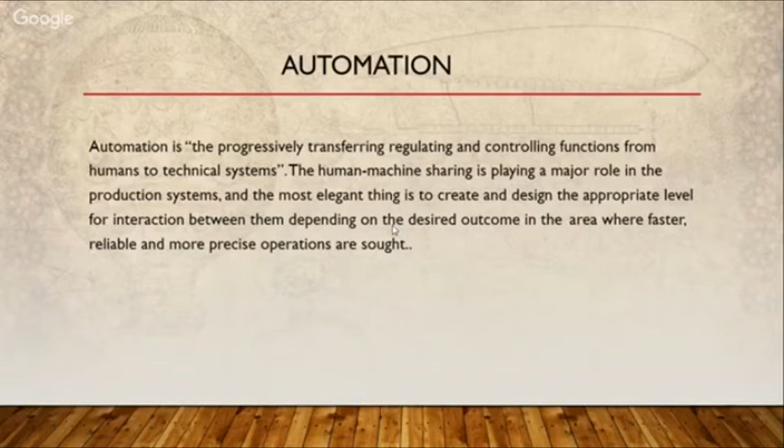Automation is progressively transferring regulating and controlling functions from humans to a technical system. This results in higher efficiencies, safer methods, and a faster way of working. There are some debatable questions on this. Some of you might question, how is it safer? If an automated system develops a fault, there is no other angle to correct it. Definitely. So we'll touch upon all this while we talk about automation and the human aspect further.

One of the prime examples of automation is in the industry. Industry is the prime mover of everything which moves and develops in the world. The automatic control of the manufacture of a product through a number of successive stages is automation. The application of this automatic control to any branch of industry or science also is automation.

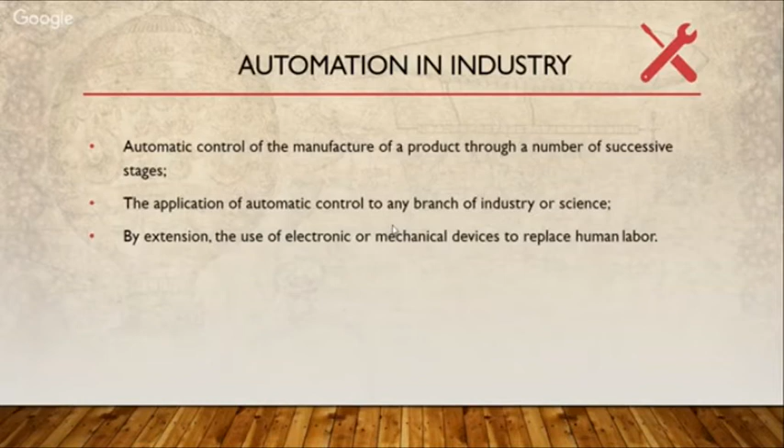So we'll first go into a brief history of robotics and automation, which you will see on the slide, that it started in a period as ancient as Greece and Egypt. This was by way of water, which was used as a power source in certain ancient ceremonies, and this was the first basic concept of automation in human life. In the 14th to 19th century, clockworks and other things driven for entertainment were a part of robotics and automation, or you can say the precursor.

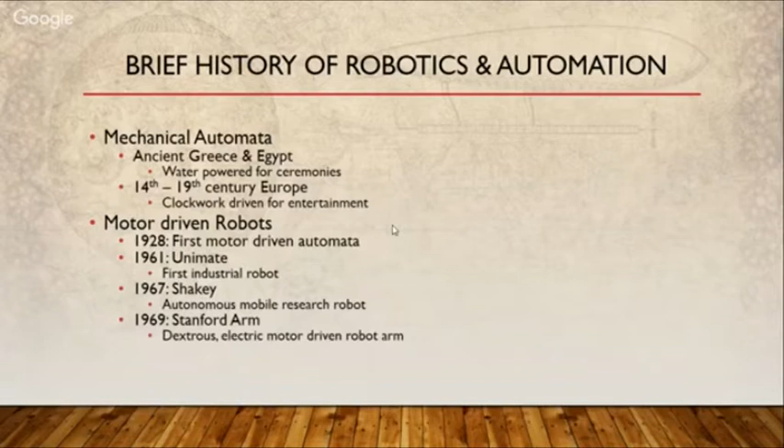Motor-driven robots were first brought into operation in 1928. The first industrial robot came in 1961. The electric-driven motor arm came in 1969. Now, automation has moved at a much faster pace in the 21st century.

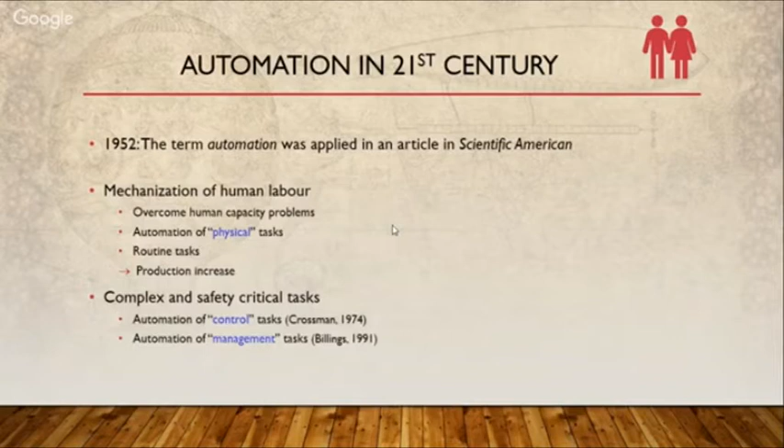We have used automation mainly to overcome human capacity problems: automation of physical tasks like loading, unloading, packing, routine tasks like production increase, welding, nailing, riveting, even segregation. So we are moving at a fast pace in mechanization in the industrial sector in the 21st century. Complex and safety critical tasks, control tasks, management tasks are also now moving towards automation.

The prime example of automation in our lives is also your cell phone. There are so many things automated through your cell phone, which today are a part of our lives. Knowingly and unknowingly, we are using automation, even to the extent of school children using the technology for their benefit.

In our lives today, automation is used for optimizing logistics, detecting fraud in the financial sector, composing art, we have digital art, and conducting research. A lot of research and testing methods are now automated. Data analysis is much faster through automation. Translations, intelligent machine systems like robots, and they are transforming our lives for the better.

You will be surprised, and maybe some of you might not be surprised, but everything Amazon, Facebook, IBM, and Microsoft is using is a part of automation and automated intelligence in our daily lives. Tesla is one of the prime movers in self-driven cars, and that is what they're using for automated controls of automobiles.

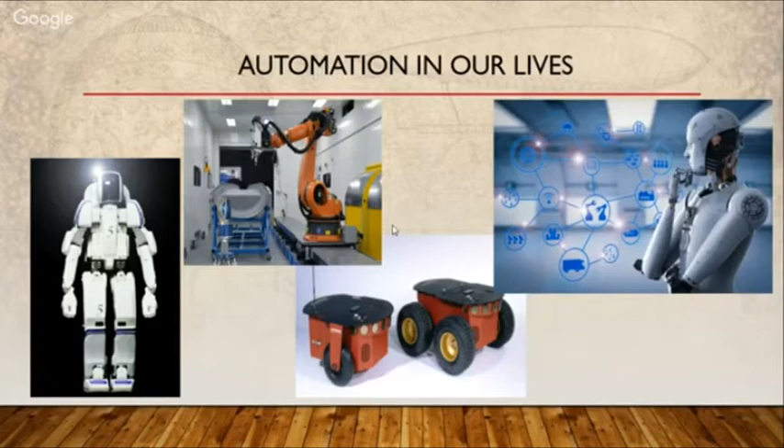The industrial robots sector is one of the most actively used and efficiently used automation systems in the world. Most of the automobile companies and automobile factories are right now automated to 90% of the extent. Certain tasks which are only left to manual labor are the ones which are being done by manual labor. Otherwise, automated robots and automated lines are a part of our lives today.

The automobiles are being made more efficiently, faster, and much more effectively. The welding which takes place in an automobile is much safer, much more uniform, and the quality is of exceptional standards, which a human being can never give. You'll be surprised to know that the rate of production of a car in Maruti today is 1.1 minute for one car. That is the time frame in which a car is being produced in Suzuki.

In the Italian automobile manufacturer, Fiat, the production rate is 55 seconds. Sometimes the capacity required at the rate at which marketing is able to sell the product also hampers the effectiveness and the speed of the automation. But the capability of the system is such that the factories in Germany and in Italy are and will be able to produce one car every 35 seconds if allowed to, and if the market demands. That is the rate at which we are talking of automation working in the industrial sector.

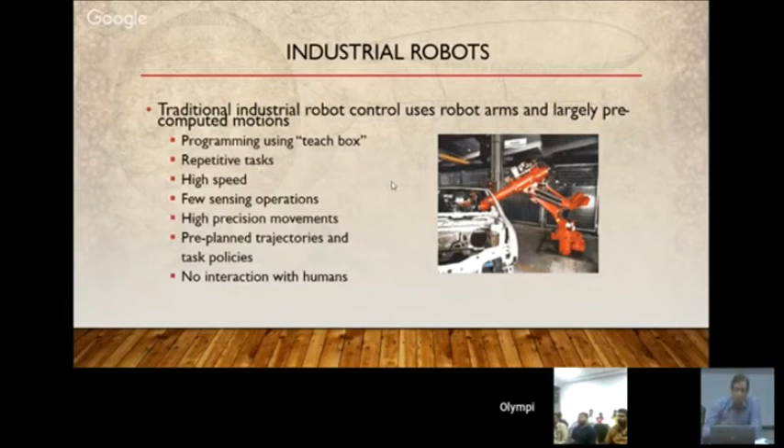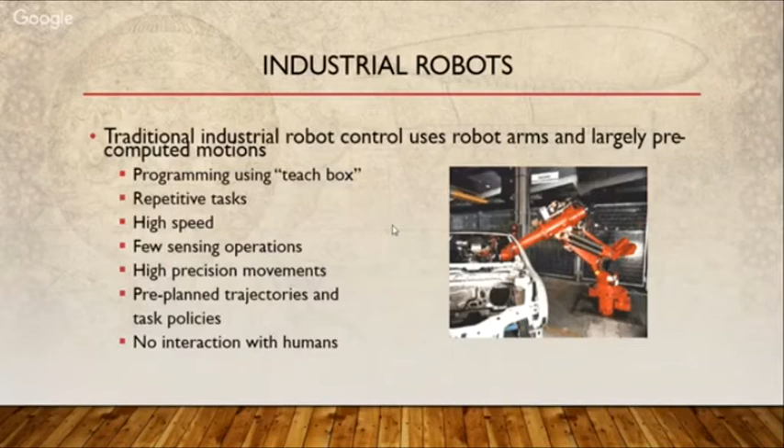Now, the industrial sector uses these robots for repetitive tasks. You can see it on the slide. For high-speed work, sensing operations, high precision movements, as I was explaining, welding, cutting to the right extent, pre-planned trajectories, and with no intervention of humans. If you are able to look on YouTube at a video showing the manufacturing of the Mercedes C-Class car, or even the Volvo, you'll be able to see the extent of automation of these industrial robots which has taken place in the industrial sector, especially in automobiles.

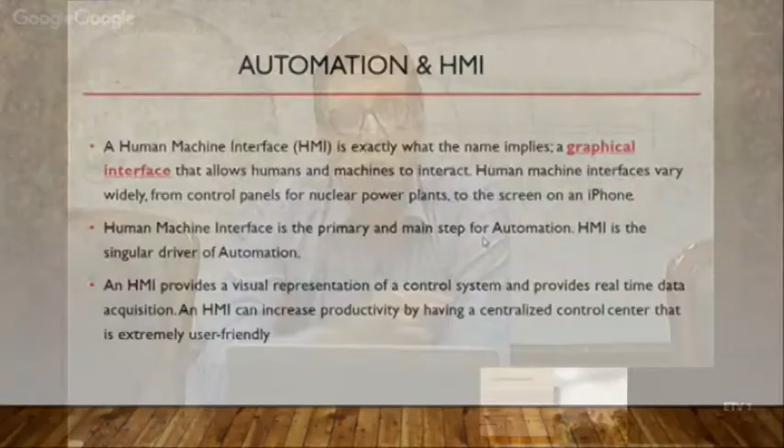The human machine interface also provides the visual representation of the control system. This can be in various forms: verbal, audible alarms, graphic interfaces, showing you how the product is behaving, how the machine is behaving, and also what corrective action is being forwarded by the machine. That is displayed to the human operator or controller of the machine. So the human machine interface is a very critical part of the whole system of automation.

Before we go into details of automation, we also need to look into the certain risks connected to automation. Not all automations are fail-proof or safe. However, the world is moving very fast into correcting these systems and taking care of these anomalies so that the automation we work with is safer and better.

Some of the risks we want to talk about are sometimes in the degree of proceduralization, so the automation system becomes too extensively overloaded to work on its own. Automation might fail due to various reasons. The technology might be so complex, or so low, that automation might not be possible.

Cost effectiveness is another factor. Sometimes manual labor, like in third world developing countries, is much cheaper than automation. You might not want to automate the line to that extent because buying or spending money on robots, or on automation, is much more expensive than actually putting people on the job.

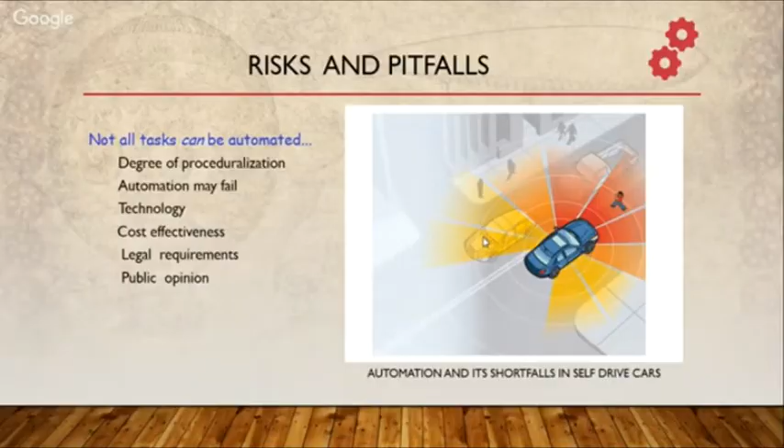You can see an example today in Europe. On the tolls, the system is totally automated. Your car has a tag that moves through the lines effortlessly. All cars are equal distance apart, sensors are alarming, and everything goes on like clockwork.

But in India, we do not go for full automation in such places. Why? Because we have cheap labor. On every toll, on every channel, you will find four people. On the barrier, two people, one person giving you a slip, collecting the money. We are still working in that system because we find that labor is much cheaper than automating the control.

Now the next point is legal requirements. Sometimes you cannot have an automated system because of legal requirements. You might have to put everything under CCTV surveillance, but there are areas where, due to legal requirements, you are not able to put CCTV cameras, so you cannot have control of visualization. Legal requirements also say that people's rights have to be respected, so you cannot put automation in places where legal rights, privacy, and other things of people are violated.

Public opinion might be very strong against technology in certain places; they will resist technology being put in. In certain cases, especially in India and other developing countries where vote banks are a huge issue, we are not able to put automated technology because getting the votes of the people is more important than making lives better and faster. That's another thing which moves there.

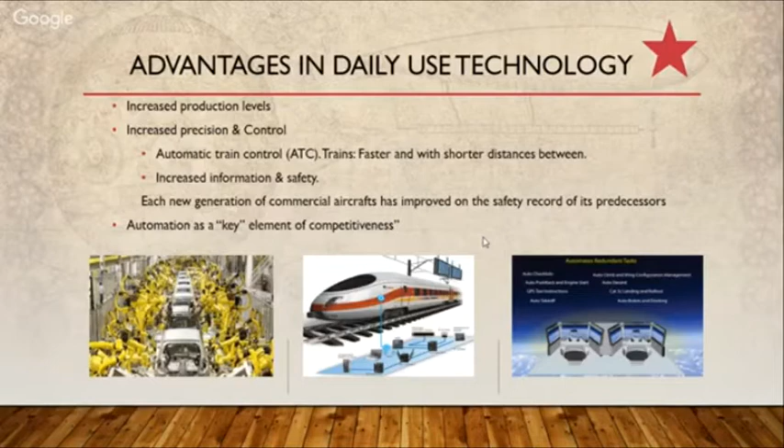We do have accidents in aircraft, and the black box gives us information, but it's a proven fact that overall safety and precision have gone up, and losses have gone down immensely, thereby saving human lives, making air travel much safer, and getting people faster from one end to the other.

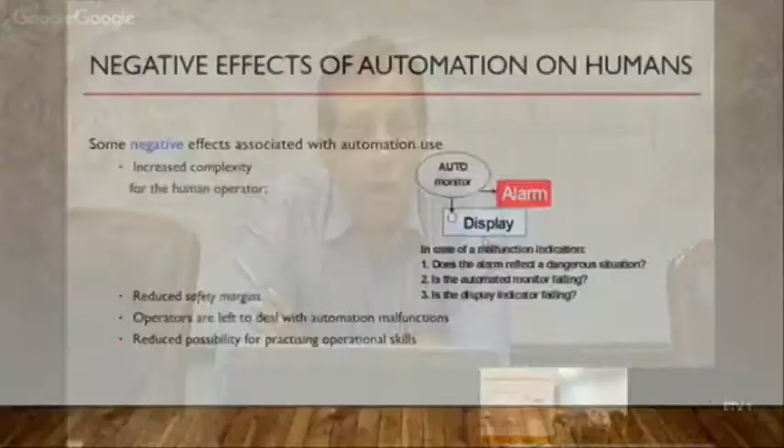Earlier, the operator only had to deal with his own malfunction, and only had to deal with how he was performing. He could re-correct himself if he found he had moved the tool a little faster. Now the operator has to move at the speed of the machine. The machine moves at an extremely high rate with the automated system, and if a malfunction takes place and the operator is not able to take corrective action, it will have serious repercussions.

One example I'd like to share is from one of the organizations where I worked, where we had an automated packing line for confectionery, bubble gums to be exact. The rate of packing of the machine was something to the extent of 2,000 pieces per minute. You can really experience, if you visualize, the speed at which the machine was moving to give 2,000 pieces per minute. There were 20 machines of this capacity working together on the line.

The automated line had to fill jars automatically, where the jar sensing automation system had to cut off the supply of bubble gums into that jar once the 150 mark was reached. You can imagine, if one machine was producing 2,000 pieces per minute, filling 150 pieces in a jar would take just 6 or 7 seconds.

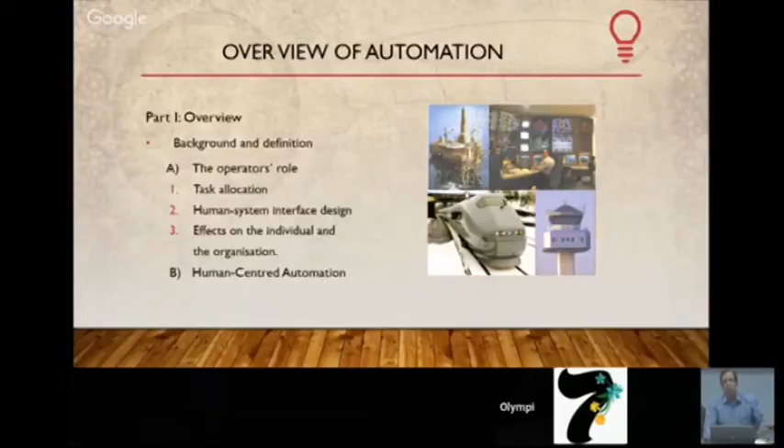Human-centered automation is another one which is a part of the design of automation system which we have to see. The key issues of automation—if we keep on with this, the most important issue is human. And the human being remains the most flexible and powerful weapon.

The human being is the most powerful weapon in the sense that we are able to justify, we are able to reason, we have the cognitive ability to think about a situation, which a machine does not have. In spite of whatever programming you might have in a machine, the human mind is still more powerful than that. Artificial intelligence definitely is moving, but we are nowhere near how a human brain can respond to a situation and be more logical than a machine.

One of the important aspects which I would like to just briefly touch upon again with you is that a professor of anthropology and history in Oxford, whose name is Professor Harari, has written a fantastic book by the name of Sapiens. In Sapiens, he gives us a very good example of how the human mind has evolved over time and how we have achieved supremacy over other animals and other beings on this earth.

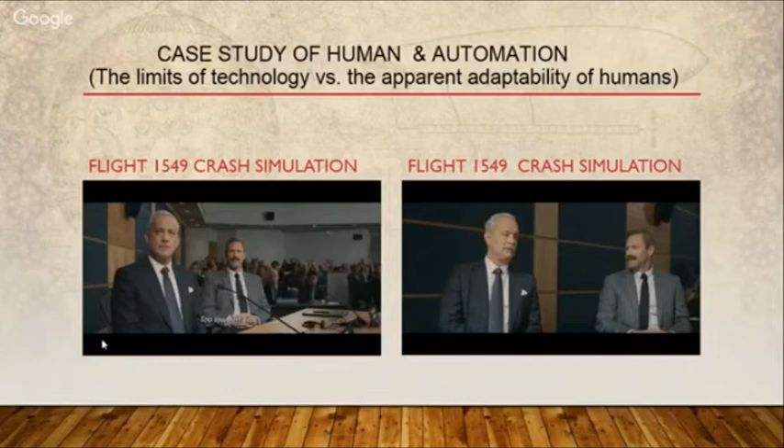The first video will show you how the investigation took place, and the two pilots shown here. This is a true incident in the history of civil aviation, where Captain Sullenberger, the commander, decided to land the plane in the river, whereas the automated system was telling him he could land on the airfield. That is what the inquiry took place over. Just have a look at the second video, which will explain how human logic and reasoning were much better than the automation system.

Too low, terrain. Fifty, forty, thirty, twenty. Successful landing at Teterboro, runway 19. They can have a whole... multiple airports, runways, two successful landings. We are simply mimicking what the computer already told us. A lot of toes were stepped on in order to set this up for today, and frankly I don't know what you gentlemen plan to gain by it. Can we get serious now? Captain, we've all heard about the computer simulations, and now we are watching actual sims, but I can't believe you still have not taken into account the human factor. Human piloted simulations showed that you could make it back to the airport. No, they don't. These pilots were not behaving like human beings experiencing this for the first time. Well, they may not be reacting like you did. Immediately after the bird strike, they are turning back for the airport, just as in the computer sims, correct? That is correct. They obviously knew the turn and exactly what heading to fly. They did not run a check. They did not switch on the APU. They had all the same parameters that you faced. No one warned us.

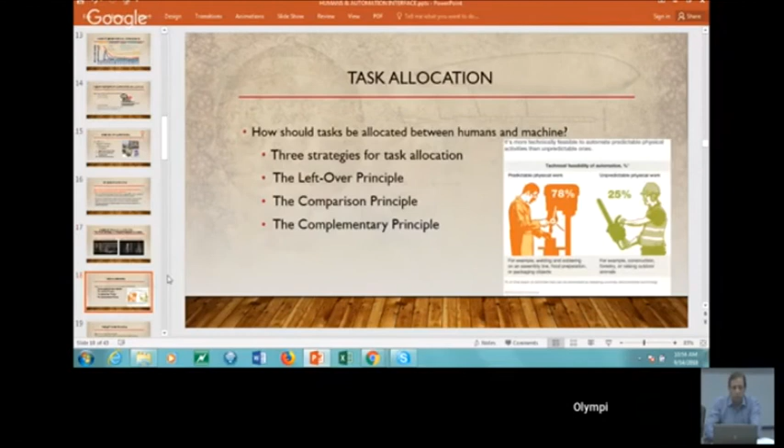Going to the next slide, we come to task allocation. Now, this is a very, very important point where we talk about how the tasks should be allocated. If you look at the graphic on the slide, it tells you that the major perception is that 78% of the jobs which can be repetitive or just monotonous can be delegated to machines or to automation.

There are unpredictable physical work jobs, cutting of trees, forestry, raising outdoor animals, and again, most importantly, jobs where human logic and reasoning is required are the ones which should be in the domain of the human operator with help from the automation system.

The three strategies of task allocation, therefore, keeping in mind what we have just seen in the videos and what we've discussed earlier, are: one is the leftover principle. Normally, tasks are allocated by these three principles: the leftover principle, the comparison principle, and the complementary principle.

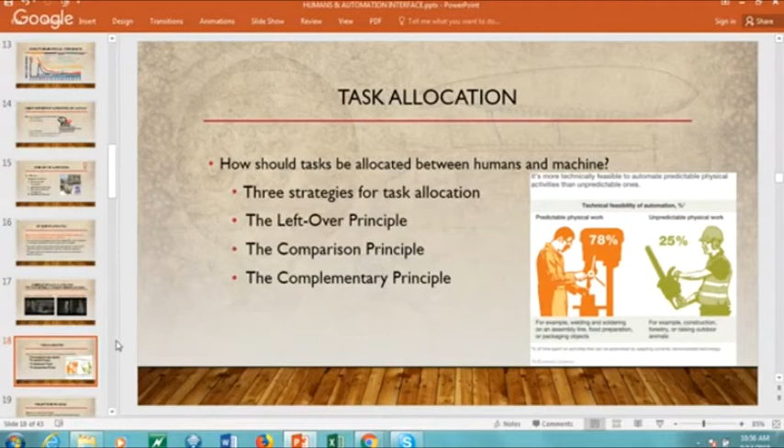We'll take these one by one. The leftover principle considers always, when designing a system, that the operator is most unreliable, that he will make a mistake, so let's put automation in this place. This is the basic premise of the leftover principle. The leftover principle also then thinks, okay, this is what cannot be done by the machine, let's get it done by the operator. So let's push it into his domain of work.

Everything cannot be automated, so let's have humans also. Let's try to make a compromise here and there, but not exactly keeping in mind his abilities. The pitfalls in this kind of system actually are that the operator needs to be much more vigilant. He is overloaded, and his cognitive requirements are not kept in mind while deciding on these issues. This is where the whole system of task allocation according to the leftover principle fails. So this is not the right system to allocate tasks. You will also all agree.

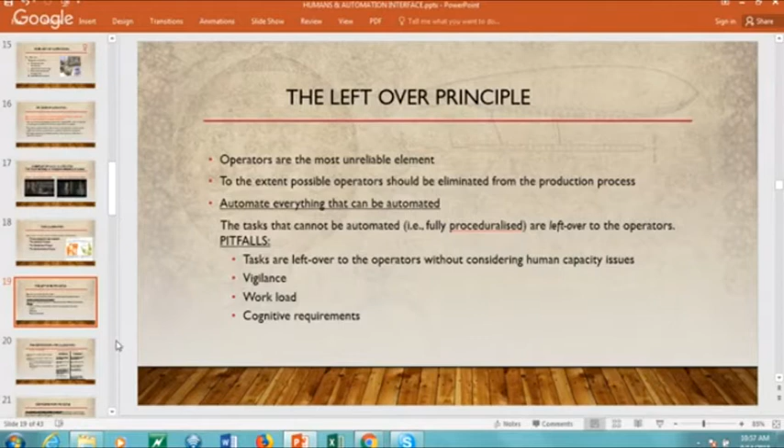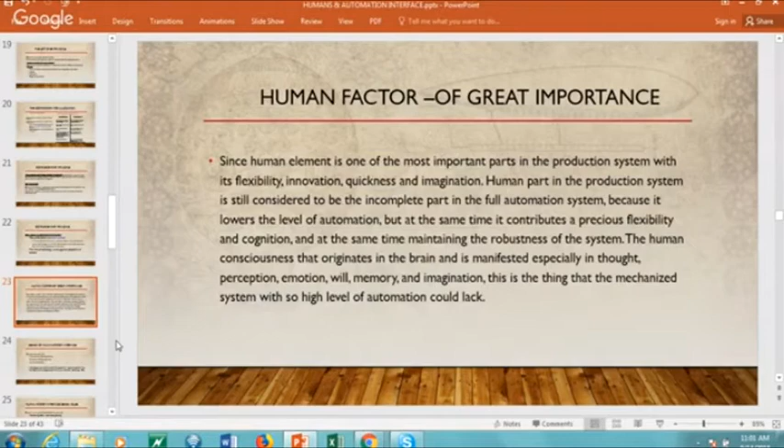Supervision is of great importance in an automated system. An automated system, like an in-flight system of a plane or of a self-driven car, or even the sensors in your normal car, called proximity sensors, which tell you that your car is near to another car or another object, still depends upon the corrective action that the operator will take. So the supervision needs to be constant. The alarm can come, but if it is not supervised, it can still result in an error or an accident.

Deviation handling. If the process has got deviations, it is the human operator only who can handle deviations. The automated system or the interface does not possess 100% capability of handling deviations. We will have ranges, we will have tolerances in every system. Again, the issue of reasoning and logic comes into play, which the human operator has to handle.

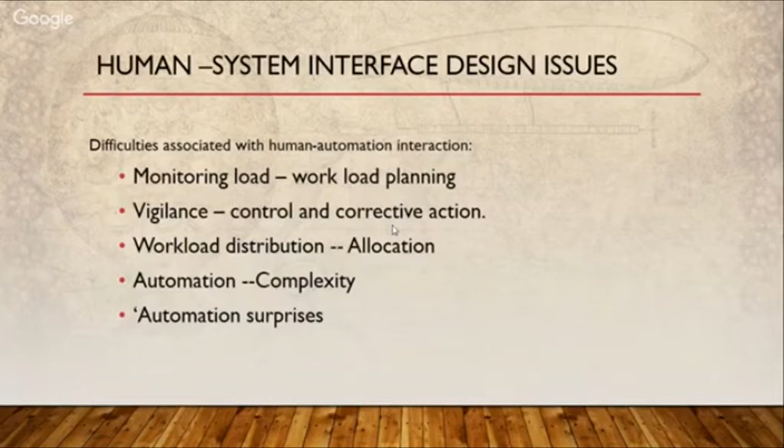The complexity of the automation. The complexity has to be such that if the automation system requires, the operator is able to handle it, and he is able to manage in the absence of the automation system. Automation surprises. Sometimes we see in operations that the human aspect, because it has not been taken into account while designing the interface, creates surprises where the operator lacks the ability or training to handle automation surprises. The complexity is a part of this surprise.

However, taking everything like this into context, we still have physical and mental isolation of the human being while designing an automation system. An automation system which is doing repetitive tasks, where the operator has to just load the piece on a machine, results in a mental and physical isolation of the human being. This results in a lot of other issues which we will discuss later. Workload distribution too high and too low, as we discussed. Because the interface has not been designed properly, the workload between the automation system and the human being differs.

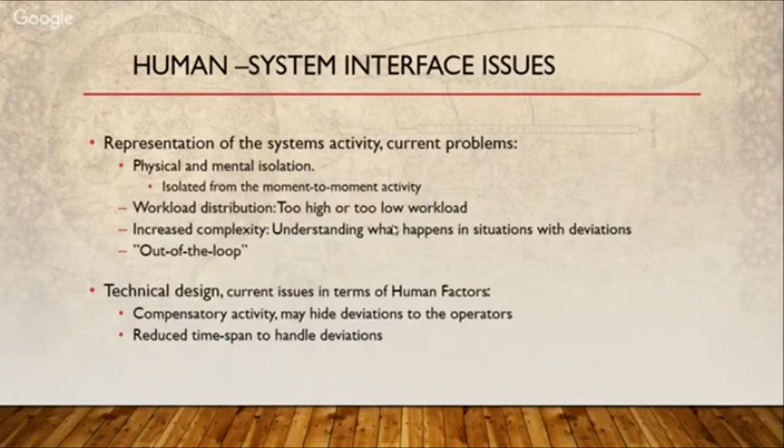Reduced time span because of the high speed and complexity of the operation. The time span to take corrective action by human beings is very less, microseconds. This aspect can be seen in any operation which is running at a very high speed, an example of which I gave you earlier also. And deviations need to be handled by human beings with the system interface helping him into taking timely action.

In the design of human and system interface, the degree of automated system should be done in a way that is transparent for the operator. So one of the most important factors that comes into play is that the human operator who's associated with the automated system needs to be aware step by step of what the system is doing, how the system is performing. The operator cannot be blind, or he cannot be cut off from how the system is performing.

Now, these problems can be handled by way of feedback from the system in various ways. The system itself keeps the operator or the human element updated on various changes, progress, and work as it is carrying out. These representations or the kind of feedback that the human operator gets can be in form of text, graphics, or sound.

So there are alarms which will tell you if there is a deviation or there is a movement which is contrary to the program. There is a graphic which tells you whether the activity is being done according to the way the system has been programmed. And text gives you a continuous display of how the program is moving, whether it is in line with the monitoring system, whether it is going out, or whether it is within control.

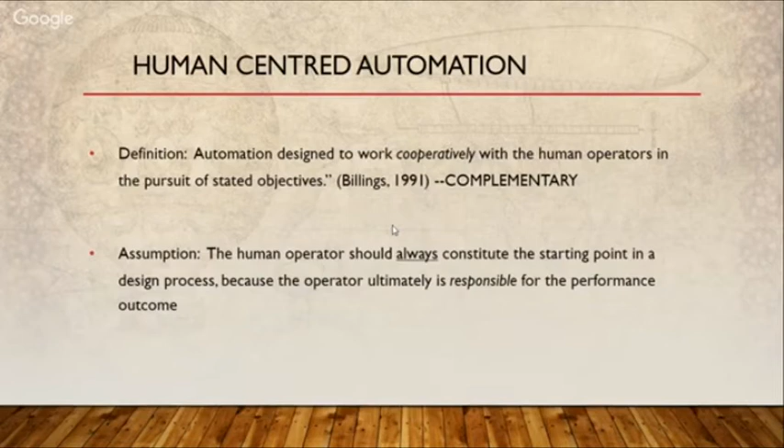Now, coming back to human-centered automation: as the name says, it is designed to work cooperatively with the human operator in pursuit of stated objectives. The three objectives we discussed - overcoming human limitations, increasing effectiveness and speed, and being helpful so there are no issues with the human being accepting the system - must be kept in view, and the automation system designed to work cooperatively with the human being. The assumption is that the human being must always be the main starting point for any design process; it cannot start from the machine. It has to take into account the human being, his abilities, his shortcomings, and where we need to help him overcome those in the process.

HCA, to take it further - the human-centered automation design system has to first keep the basic premise in mind: the human operator must be in command. We cannot take away command from the human operator, because doing so puts at risk issues we've discussed earlier - taking corrective action, not grasping the complexity of the system, not being able to respond faster to errors. All this comes into play. So once we establish that the human operator is to be at the center of this command, why is it to be done? One reason is so that he is able to command effectively - the human operator must be involved, then only will he be able to command effectively.

To command effectively and to be involved, the human operator must be informed. He has to be a part of the feedback system. Immediate feedback or immediate response has to come to the operator to feel involved and to command the operation.

The human operator must be able to monitor the automated systems. Monitoring, again, being informed is a part of monitoring. If there is regular information, he will be able to monitor the system much more effectively.

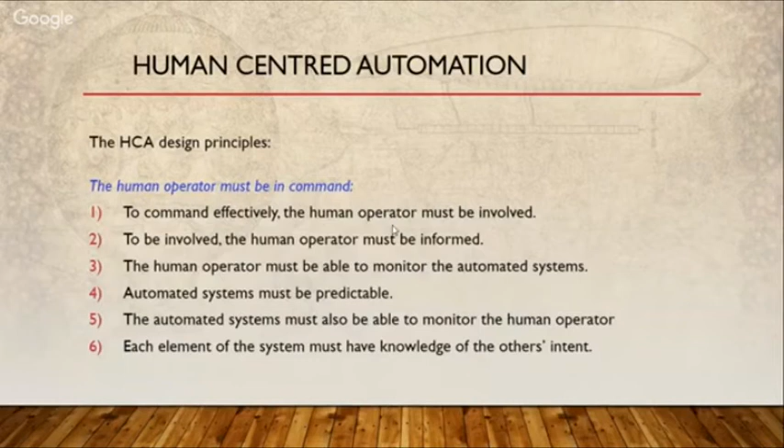Automation can assist by providing a range of management options. That means, logically, if automation assists by providing a range of management options, the pilot is able to take a logical decision. Otherwise, the logic is left only to his own perception and understanding.

If the pilot is involved, the automation system can assist by providing better and more timely information - aiding judgment on whether he can turn, whether he can land in these circumstances, what is the wind velocity, what is the temperature, what exactly are the air pockets. All this can assist in timely information and help in taking a better judgment.

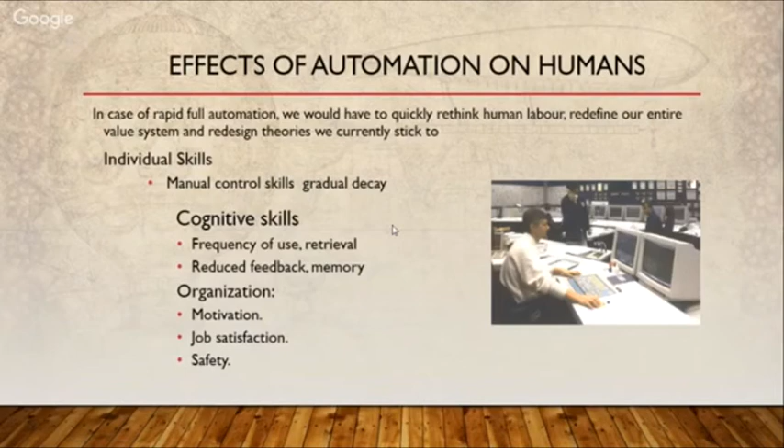The worker might have worked for a bonus or an incentive or satisfaction where the number of pieces he produced were part of what he was earning. Also, to show his skills, his effectiveness, his capabilities, there was a number with which he could be associated, that this worker has won a prize because he could produce X number of pieces in his shift.

If the automation system is designed without him, the effect on his morale, with people saying 'it's the automation system producing, it is not you,' undermines his capabilities and his motivation level goes down. He will always feel threatened that his incentive is going down because now he's no longer associated with productivity. Job satisfaction results in the same thing. The motivational factor, when it goes down, the morale goes down, job satisfaction starts going down, and the operator will never perform to his optimum level.

Safety is affected because the worker will become complacent. He will think that the automated system will take care of itself, and he will not be that vigilant. Again we come back to reduced feedback and reduced memory, which are effects of automation. This also results in complacency, and complacency results in accidents. You will find that although automation helps in giving alarms, if the operator is not vigilant enough, because of repeated working day in, day out on an automated system, his reflexes go slow, and that results in lack of safety.

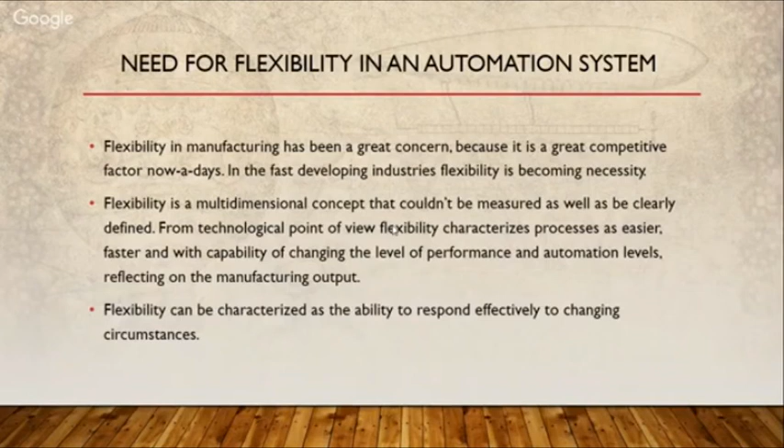So flexibility can be characterized as the ability to respond effectively to changing circumstances. This is where collaboration has to happen between humans and automation.

We will show you two videos which give you the present use of how automation and the human angle have come into allocation of tasks, where using automation, if only human labor was used, it would have resulted in much lesser productivity and a less efficient process. This shows how automation has helped, and also takes you through how automation is moving ahead for the future, keeping in mind these collaborative issues to really take technology to a newer level. So just have a look at these, and then we come back to the slides again.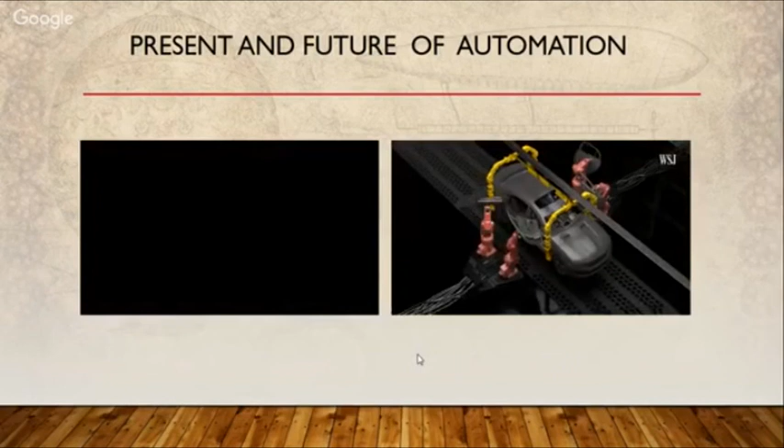Yes, right. To see how they're changing manufacturing and whether they're sealing the fate of low-skill workers. Every other year, Tokyo plays host to the world's largest robotics trade show, IREX. It's no coincidence the show is in Asia. Here, robots are being bought and sold in numbers unrivaled anywhere else in the world.

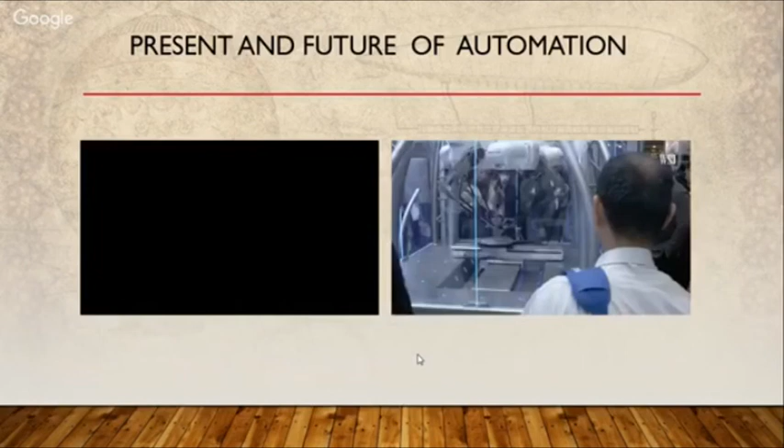These are the types of robots Professor Eric Brynjolfsson is keeping an eye on as MIT's chief scholar on the digital economy. We used to have to really painstakingly teach the machines step by step, program them what to do. And now machine learning is enabling the machines to figure out on their own how to solve problems. You put together the algorithms, the data, and the computer chips, and you get sometimes a million-fold improvement in the performance of these systems. Million-fold improvement.

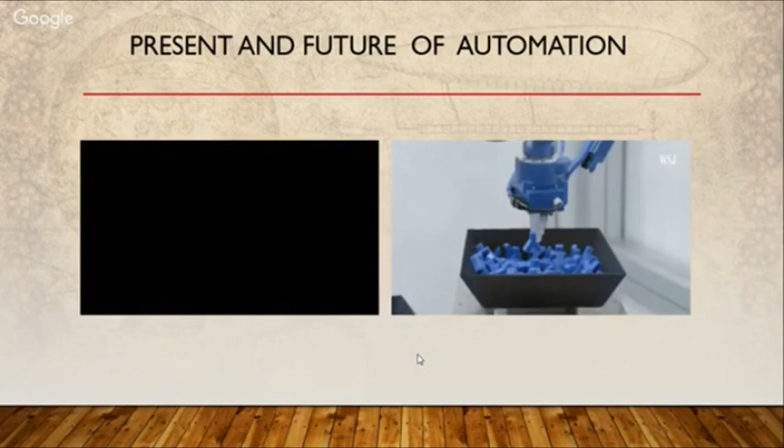Yeah. And what does that allow you to do? So one really important thing to do on the factory floor is just be able to recognize objects. And that's something that only humans could do well until recently. At IREX, we witnessed a robot handling a task that I, as a human, don't do so well, futzing with one of those pesky tape dispensers.

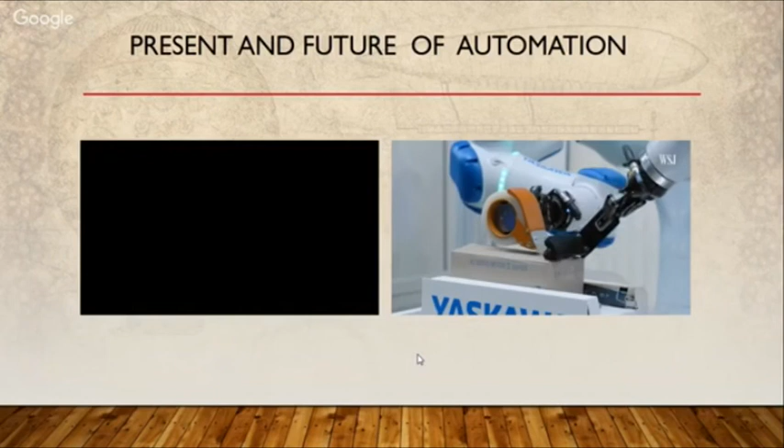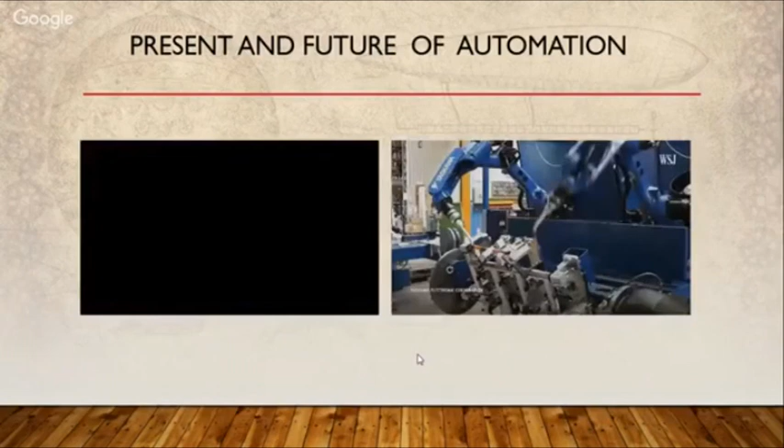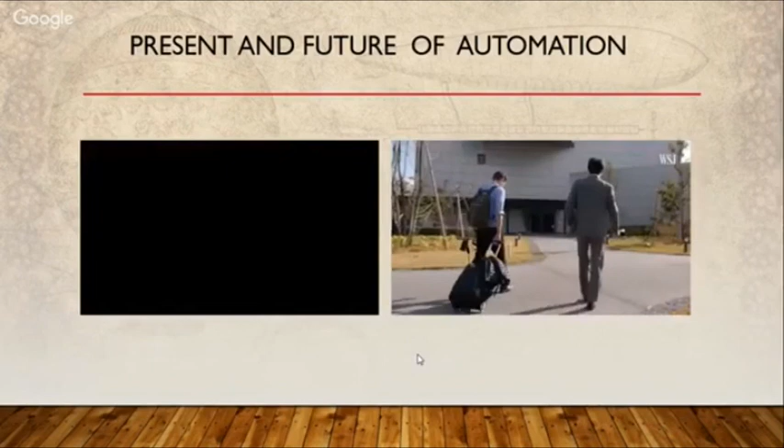It's among the latest offerings from Yaskawa, one of the world's largest manufacturers of industrial robots. Its main sellers are large industrial robots that do dangerous things like welding car parts. We visit one of Yaskawa's robot manufacturing facilities in the southern port city of Kitakyushu. Here, the public can try controlling and racing against AI-enhanced robot arms.

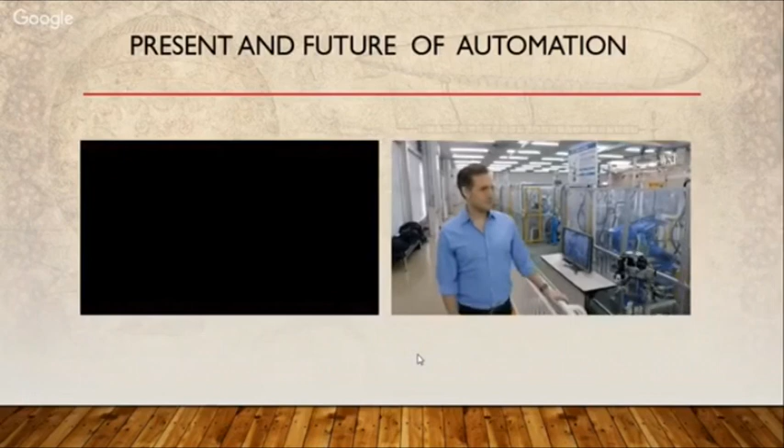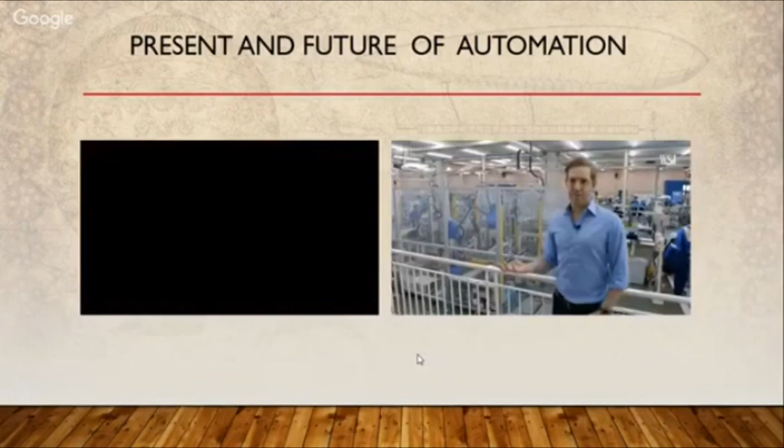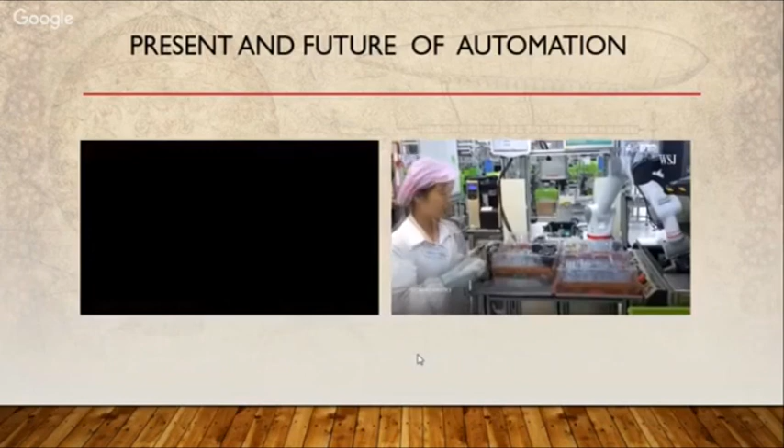You're done. We got to see where the robots are made. The robots themselves, they're sealed off by these plastic barriers. The workers aren't allowed to be in there while they're in operation because they're making these very fast movements. The head of the robotics division at Yaskawa, Masahiro Ogawa, seems most excited to talk about robots that don't need to be walled off from humans, that work alongside employees. In the industry, they're called cobots.

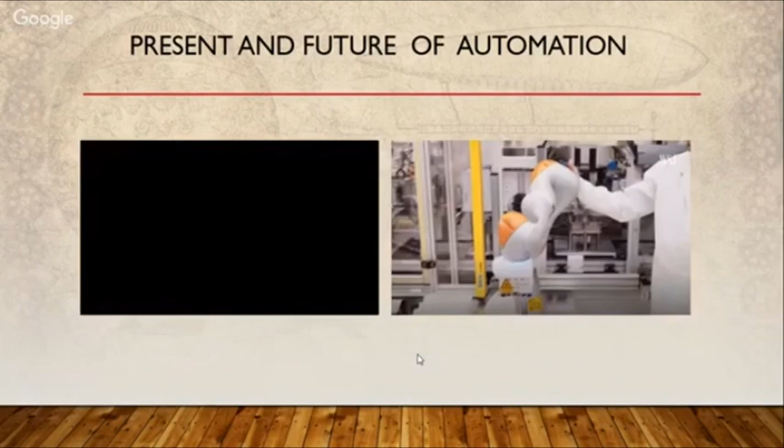The International Federation of Robotics predicts in coming years, cobots will lead the robotics industry. That's partially driving startups like China-based Elephant Robotics to get in the game. Hit people, so you just stop. Yeah. So work with people. Yeah, works with people.

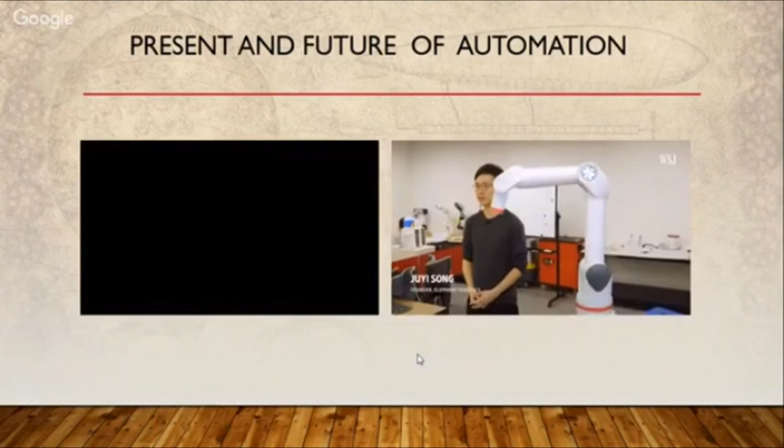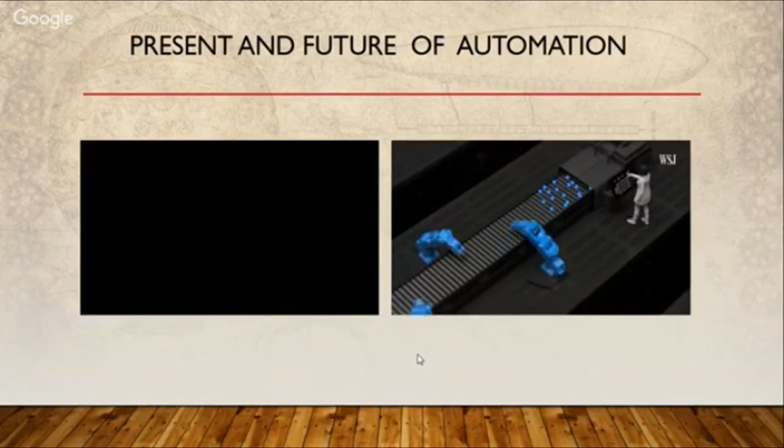We asked their founder, Juyi Song, how his cobot is different from traditional robot arms. It moves not that quick, and it is very, very light. Okay. So it can work with people. So this is the most important thing. In addition to being safer, the collaboration proves to be more productive. A study conducted by MIT researchers found that human-machine groups were more efficient than teams wholly comprised of one or the other. They also reduced human idle time by 85%.

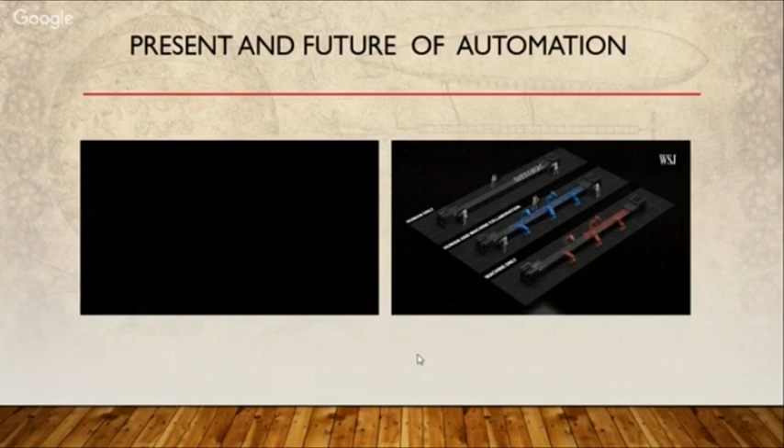While traveling through Japan, we visited Huis Ten Bosch, a Holland-themed amusement park. There we checked out its latest attraction, a robot restaurant. How many okonomiyaki pancakes can the robot make in an hour?

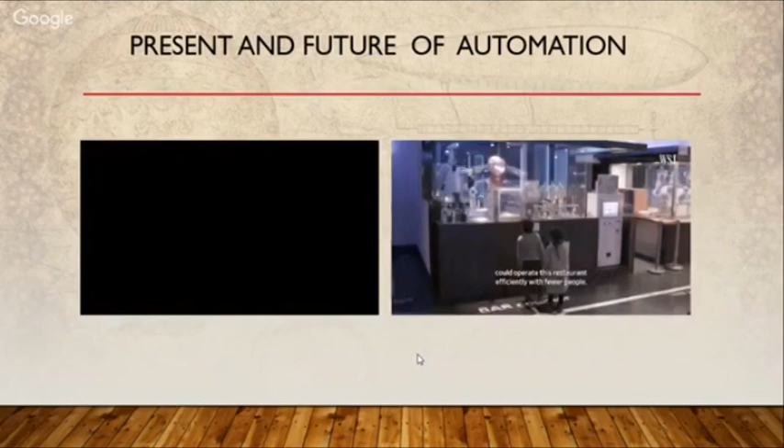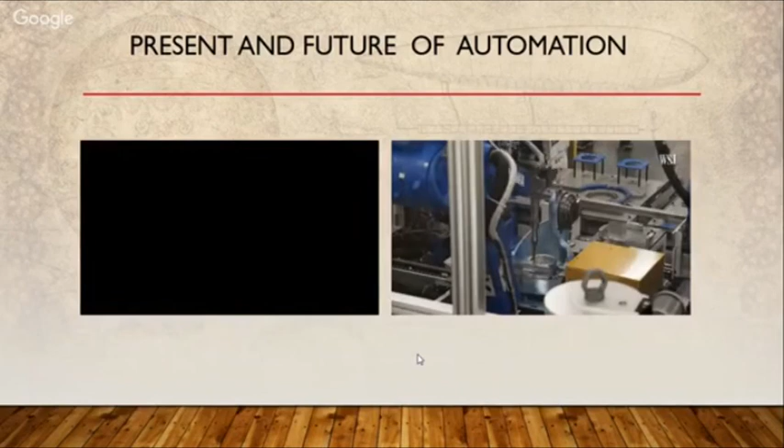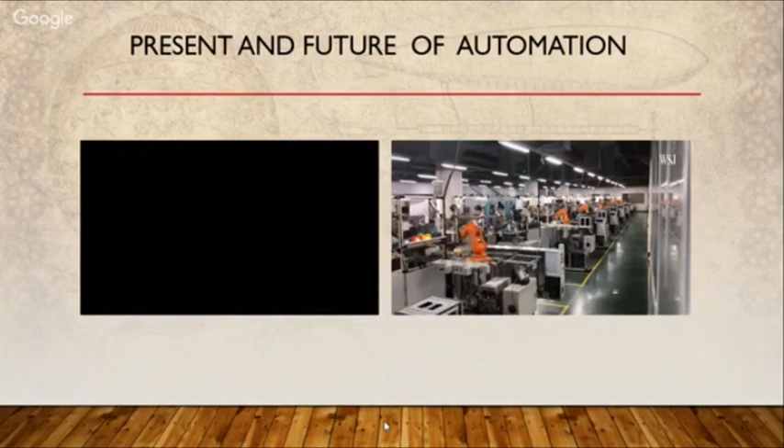It's gimmicky by design. Back at Yaskawa, Ogawa tells us most of the customers who come to him looking for new automation solutions come from China. China market huge, and the growth ratio very high. How high? Last year, Chinese demand for robots grew more than 20%. One reason for that is China's working population is aging. By 2060, the average Chinese citizen is projected to be 50 years old.

To see the impact of industrial robots on manufacturing in China, we traveled to an area that's considered the electronics capital of the world, the Pearl River Delta region.

So just to hold it a little bit here, the idea to show you here was that it gives you a very direct insight into cobots. The idea that we were talking about in human-centered automation design, where we are talking of collaborative and complementary automation. Cobots is the direct descendant of this philosophy. And as you must have seen, the experts in the field also were commenting that the day of robotics is finishing off and the day of cobots is the future.

The idea to show this video was just to take you through to what the future holds and what exactly are we moving towards. So this video gives you a direct insight that there has to be a collaborative effort and the robots have to collaborate with humans. That is why they're called collaborative robots or cobots.

If the worker and the robot or the automated system are able to work together, that is the best for the industry in terms of error-free and speedy productivity or achievement of targets, whatever we call it. It can be in any industry. So let's not limit ourselves to the production lines in a manufacturing facility. The collaboration of the automated system and the human being is the most important aspect of any automated system to be implemented in any facility.

So let's move to the next, where we see human automation cooperation in critical fields where it can take place. The latest field in which this has been inferred, and this is going on at a very fast pace, is medical robotics. Medical operations, surgeries are now being done by robots but controlled by human beings, in the sense that the doctor is able to analyze the whole system. He's able to see the patient. He's able to detect the symptoms, the area of operation, and through the robot and the simulator that he controls, he's able to do a surgery or an operation with very high precision and in an error-free mode. Eye surgeries, heart surgeries, brain surgeries are now on a large scale being done through medical robots, but being controlled by a doctor.

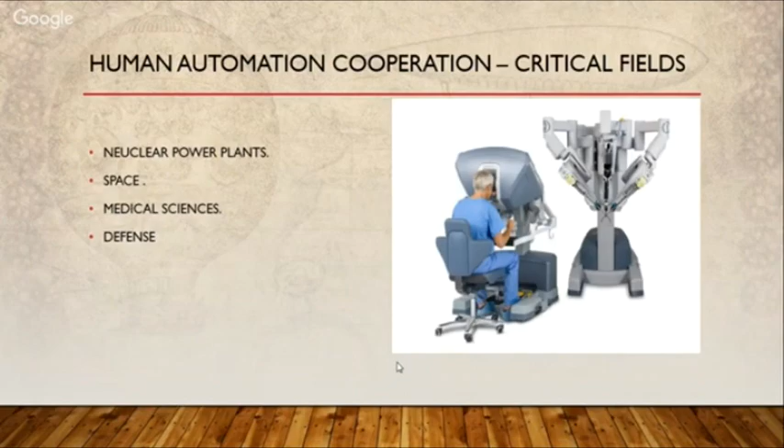You cannot expect to really let the robot work alone. The robot will never be able to work because it is the judgment and the logical decision of the doctor, the analysis which the doctor has done of what has to be done where. Again, these are decisions which work in collaboration the best, and the outcome for a patient to have an error-free, high-precision surgery done by a robot being controlled by a doctor is the ultimate that you can think of in human automation collaboration and cooperation.

Space is another field, as we've discussed earlier. The astronauts, their instruments, the equipment are controlled even from the space station down on Earth to help them out in activities which they have to do in space. The data being collected, the analysis of that whole data, giving feedback to the astronauts and to the space station is again done through systems which are hundreds of thousands of miles apart from each other.

Defense is another field where automation and human cooperation is happening at a large pace. Drones used to attack and neutralize terrorists or targets which are supposed to be unsafe for human beings or for human civilization are controlled by human beings at a remote location, and the attacks are carried out. Defense radars, data again referring to alarms, to detection. Everything in these fields is being done to a large extent with the cooperation of human and automation. So these are very, very critical fields which give an example of how human automation cooperation can work to the benefit of society.

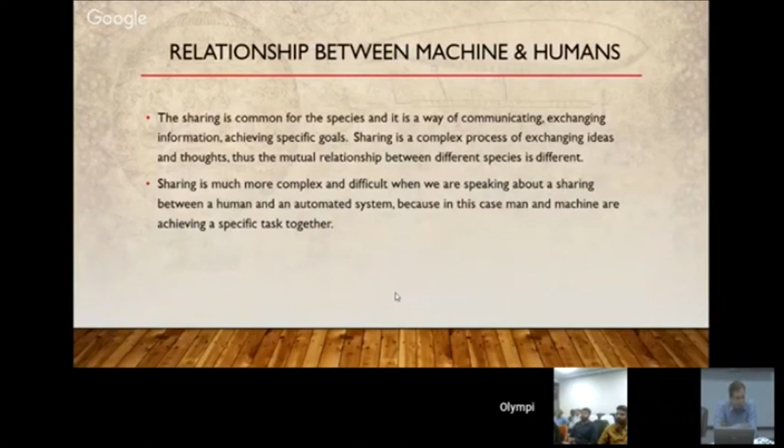Okay, coming to the next slide, we have the relationship between machine and humans. Sharing is common for the species, and it's a way of communicating and exchanging information. As I had given an example in the lecture in the morning, human beings are the only species on Earth which can communicate with logic, with visualization, and exchange information. Now human beings are developing artificial intelligence and automation systems to the extent where this information can be exchanged for the benefit of everybody. Sharing a complex process and exchanging ideas and thoughts was till now the singular domain of human beings, but now through automation systems it is being done to a large extent over hundreds of miles apart from each other.

Because sharing is a complex and difficult phenomenon, we talk about the sharing between a human and an automated system because of the tasks that they can achieve working together. The automation system provides the speed, the human system provides the logic and the cognitive facilities, and together they can achieve much more than each system standing alone.